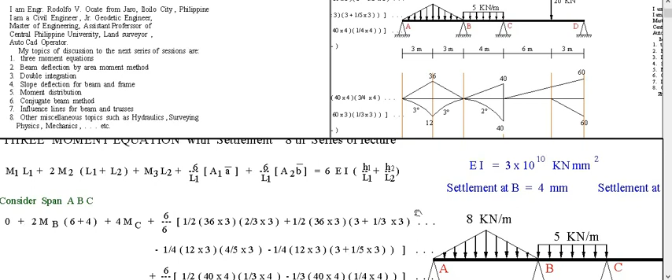Today we will have this three-moment equation with settlement, the 8th series of lecture. We have this figure. Just look at the figure at the lower portion. So we have this beam, three-span beam A, B, C, D, given the EI 3 times 10 to the 10 kilonewton mm square.

The settlement at B is 4 mm. Then the settlement at C is 6 mm. Distances are here. This figure is also the same as the figure above. Okay. So we'll adjust the... so we have the formula.

It's a very long expression. M1 L1, the first span moment. Usually the three moment equation uses two span at a time. So we have unknowns here, moment at B, moment at C. Three moment equation meaning the unknowns are the moments. So in this figure our unknown here is moment at B, moment at C.

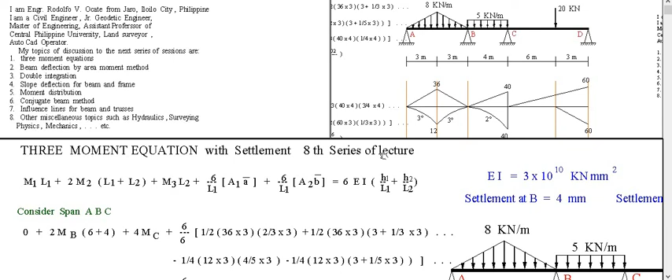Now on the right of the equality is the formula for the constant of the settlement, 6EI parenthesis H over L. So we have 2. On this span ABC we have the settlement at B and C. Okay, we will substitute to the formula. Consider the span ABC, this one. It's better, clearer to see in this figure. ABC. So the moment at A is really 0.

Okay. Then twice the moment at B times the span on the left plus the span on the right. So 6 plus 4. Then moment at C, unknown moment at C times the span of 4. Then the constant of the figure, this one, derived from here.

The 36 is derived from, okay, if we consider span AB as a simple beam, the reaction of A is to carry 1/2 of this load, or 1/2 of this triangle. 8 times 3 is 24 divided by 2, or 12. Next, pivot that at the middle point, so 12 times 3 is 36. Also, reaction at B is also 12. Then bring that to the middle is also 12 times 3.

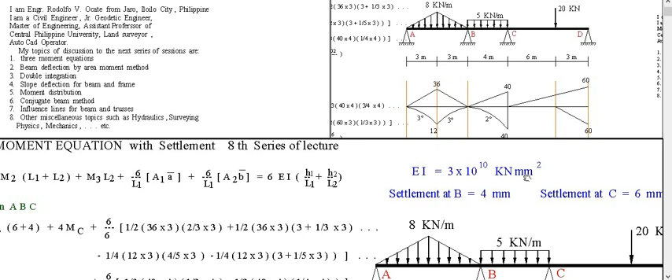Then equal to the 6 EI times the settlement. So 6 EI is 3 times 10 to the 10 divided by 10 to the 6. Why divide by 10 to the 6? Because the unit of EI is kilonewton mm square. Convert mm to meter, so divide this by 1000, then square that, square the linear measure. So 1 over 1000 square is 10 to the 6. Actually this is 10 to the 4th. Then h over L1.

Now, settlement at B is 4, settlement at C is 6. We will interpret this. For a two span ABC, consider B, the middle part, as the origin. This B will settle by 4 mm. Looking on the left, A is higher by 4 mm because B settles by 4 mm. So looking at B, A is higher by 4 mm. Okay, positive. Convert that to meter, 0.004.

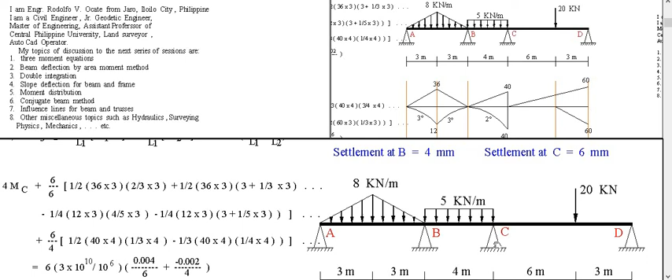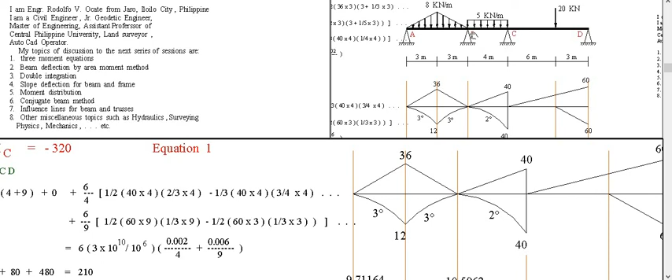This one, I was confused with the second equation. Okay, B is higher by 2 mm and D is higher by 6 mm. C settles by 6, so D, still in the original position, is higher by 6. So the constant now of the settlement is all positive. The middle part is lower. B is higher by 2 and D is higher by 6. So this is why we have positive.

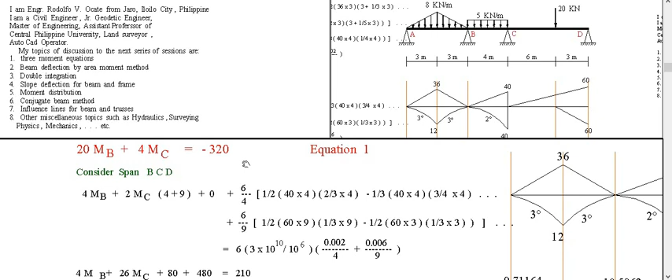Then the span on the left is 4, span on the right is 9. Okay, so simplifying this for the second equation, span BCD: 4 MB, this is 13 times 2, 26 MC, the first constant is 80, then the second constant is 480, then the constant for the settlement is positive here, 210. Now bring this positive to the right of the equality, then it becomes negative 350. Then this is equation 2.

Solving the two equations, equation 1 and equation 2, we have two unknowns, MB and MC. Then moment at B is minus 13.730159. Moment at C is minus 11.349206. Okay. Now, solving the reactions. To solve for the reaction, consider this span AB only. Cut the section at B. Consider the left portion AB.

So we know the moment at B is minus 13.73. If we consider AB, we can see this left portion with the loadings, and we can see the right portion here as the moment at B of minus 13.73. So we have the moment on the left and the moment on the right. Now, take moments at B, equal to minus 13.73. Then sum up all the moments on the left.

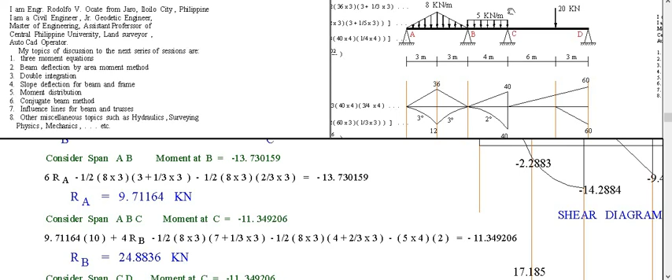Then solving for RB, we consider the left portion of the cut section at C. So all the moments on the left are these loadings and the reaction at A. Then on the right of C, since we cut the section here, the moment at C appears as minus 11.349.

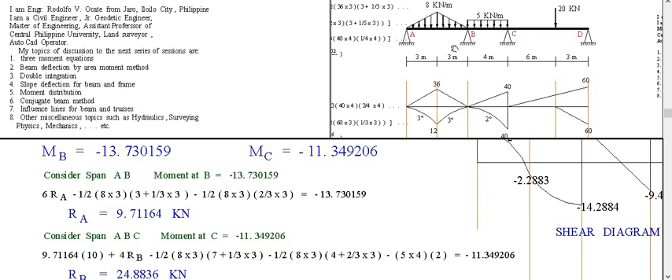This one, the left portion, is the computation here on the left of C. All the loadings here plus the reaction at A. Okay, so solving, reaction at A is 9.711 64.

Times distance of 10, 6 plus 4 meters, then plus RB unknown times 4. We take moment at C, times 4, then minus the triangle, 1/2 times 8 times 3 times distance of 7 plus 1/3 of 3.

The second triangle from C, this area is 1/2 times 8 times 3 times 4, times 2/3 of 3. This one, 4 plus 2/3 of 3. Then this uniform load area is 5 times 4 times the middle, which is 2 from C.

Simple as that. Then equate that. All the moments on the left are this, all the moments on the right of C is minus 11. Equate the moment on the left and on the right to be equal. These two must be equal. Moment on the left, moment on the right.

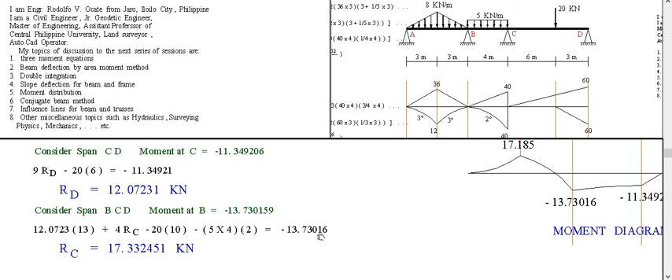Consider the span CD. If we cut C here, we consider all the moments on the right equal to all the moments on the left. Moment on the left, remember we cut this. ABC does not appear here in our computation, but there is a moment at C of minus 11.349.

We consider the CD, so we take moment at C, which is minus 11. RD times 9 minus 20 times 6, then equate that to the moment at C of minus 11.34921. This is just a simple algebraic equation. RD is the unknown, so RD is 12.0723.

So RA solved, RB solved, RD is now solved. RC is still unknown, so we consider the span BCD.

RD is known, moment at B is known. Okay, so take moment at B. It is not 0. Remember, the moment at B is not 0. There is a value of moment at B, it is minus 13.73. A common expression when solving the problem is that the moment at a certain point is equal to 0, but here in our case, the moment at B is not 0. This is minus 13.73. So take moment at B, consider BCD.

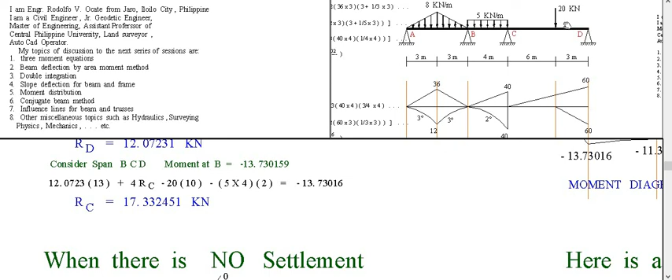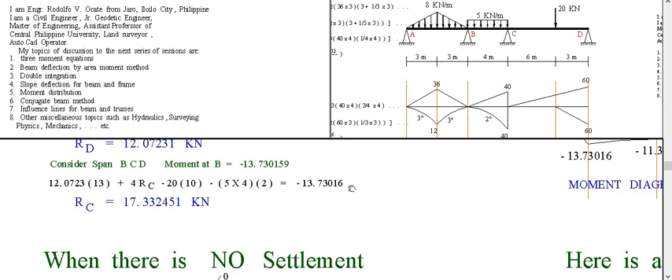The right portion is RD as 12.0723 times this distance as 13, then plus RC unknown times 4, minus 20 times 10, and equate that to the moment at B, minus 13.73. Then solving RC is 17.332451.

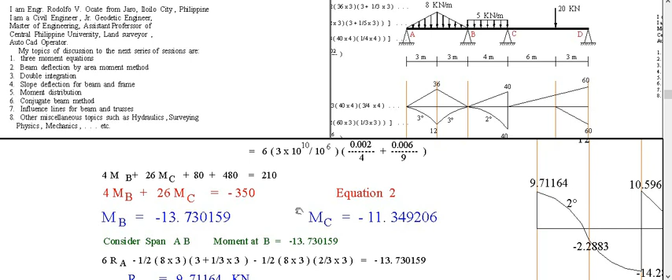Okay, we have now solved 3 reactions: RB, RC, RD, and 2 moments from the simultaneous equation. Now complete, we can draw now the shear and moment diagram here.

Okay, this is the shear diagram. Note here that the curve is reversal. It is curving like this.

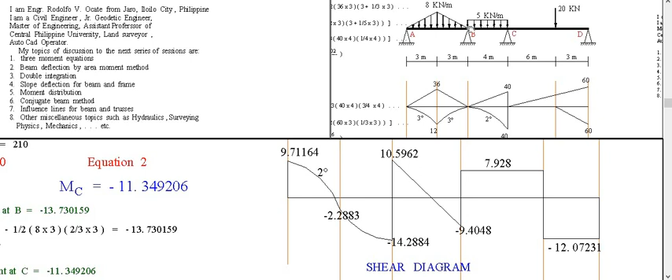The rate of drop of the force here is first very small, then as we go on the drop becomes bigger. That is why in the shear diagram, the drop is very small, then as we go on to the center span, the drop is big. Then here the drop is big, the rate of dropping of the force is big. Then here on the right, the drop is becoming smaller, so it becomes horizontal, then goes up, then goes down. Reaction at C goes up, then goes down by 20.

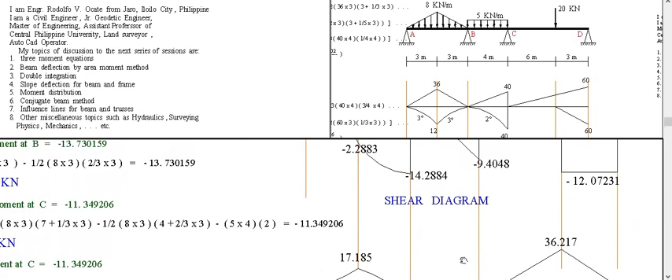Okay, the moment diagram will look like this. This topic of plotting these figures belongs to the strength of materials, and beyond for the discussion here.

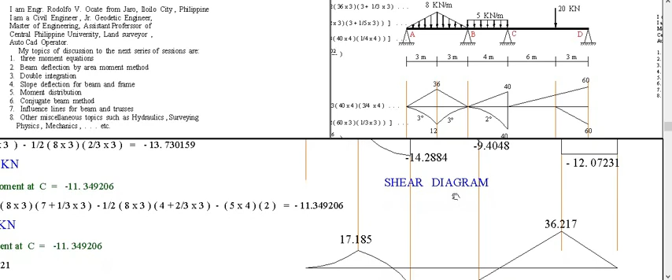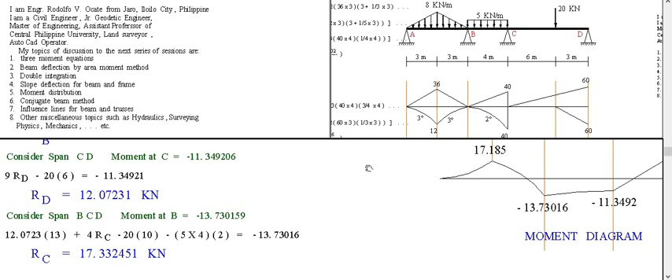Okay, now that completes the discussion of this problem. Now, when there is no settlement, we will solve another problem when there is no settlement at B and C. So the settlement at B and C is 0. Now the solution is just simple.

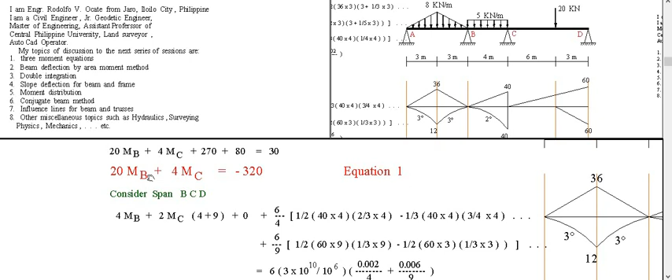Remember from this equation 1, this is our expression. I will show to you equation 1: 20, 4, 270, 80, and 30. Settlement here is 30, the constant of settlement. If there is no settlement, this 30 will become 0. So it is 270, 80, and make this a 0. So the sum of this, transferred to the right, is minus 350, and this is equation 1.

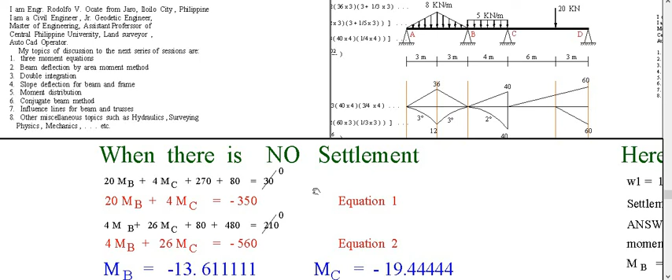This is another problem when there is no settlement. Okay, this is equation 2, again the settlement on the right is 0.

Simplifying this gives 560 minus 560. Then solving the two equations, the moment at B is minus 13.611, and moment at C is minus 19.444. Then the same approach applies when solving the reaction when there is no settlement.

Consider AB. Take moment at B as negative 13.611. The forces on the left are RA times 6, minus 1/2 times 8 by 3 times distance from B, which is 3 plus 1/3 of 3. Then minus another triangle 1/2 times 8 by 3 times distance from B, 2/3 of 3. Equate that to the moment at B, 13.611. Solving for RA gives 9.73148.

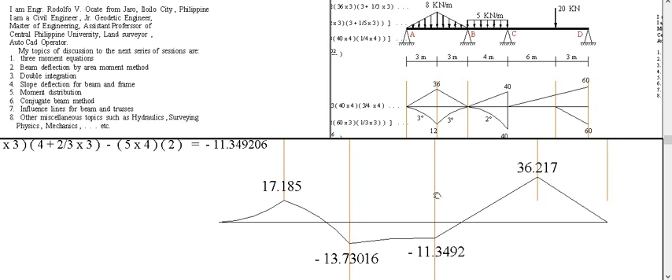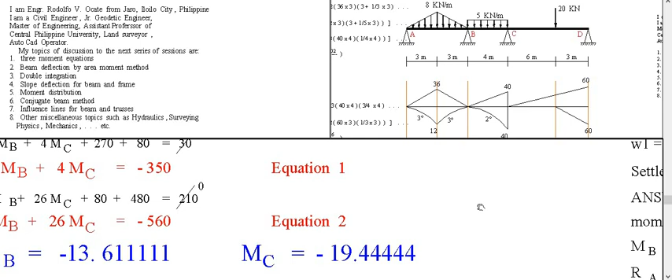Now the shear and moment diagram is almost the same as this one. The shear diagram will look like this, and the moment diagram is almost similar, only the level of the forces differ from this one. The figure is almost the same for no settlement. That ends the discussion on this problem with settlement and without settlement.

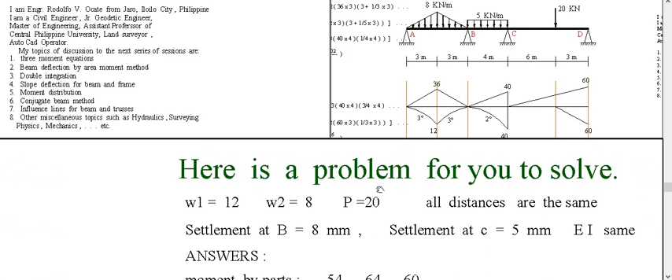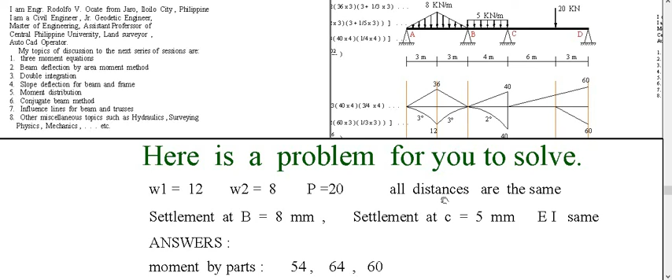Here is a problem for you to solve. Change W1 from 8 to 12. Change W2 from 5 to 8. P remains 20, the same. All distances remain the same. Then you will solve this.

The answer is ready for you. The moment by parts levels are 54 here, 54, 64, then 60. The lower portion is the same. Then moment at B, moment at C by simultaneous equation, then RA, RB, RC, RD. These are ready answers for you, only check this with your own computation so you have a guide.

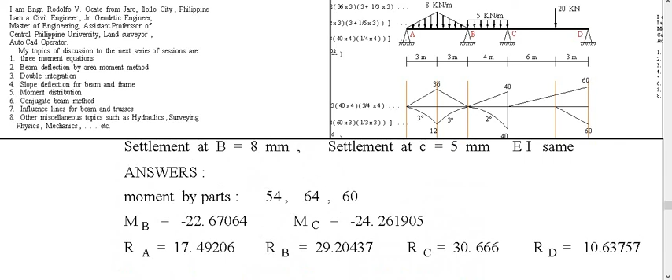Then when there is no settlement, the same given values apply as before: W1 is 12, W2 is 8, the same given, only that the settlement is 0. So we have another set of answers.